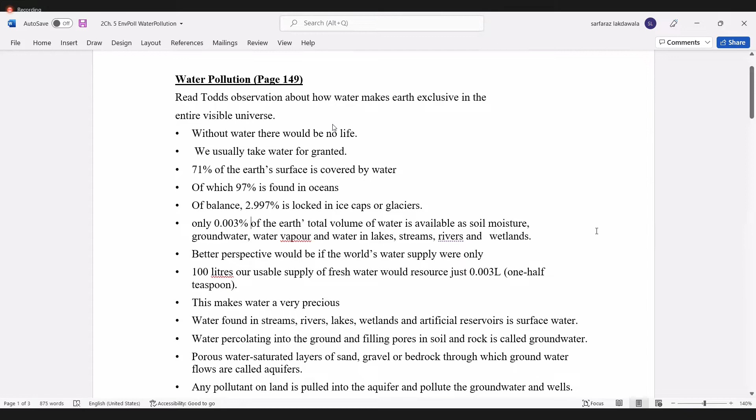No idea? Let me tell you, you'll be surprised. This hair dye is used to color buffaloes, which are sold in the mandi market. The blacker the buffalo, the better its health is perceived to be, so people dye them and sell it for a good price. Nothing surprising in our country - we even sell humans by coloring their hair, marketing them. So why can't we market and sell buffaloes the same way?

So this was research done by Godrej themselves, to find out why hair dyes sell more in Haryana than any other place, and they found this was the major reason. Apart from people using it, which isn't high consumption, it's for buffaloes. And if you want to paint one buffalo, you need not one box but many, so obviously consumption is high.

Now we are diverting from our topic. Our topic is water pollution, but since we started talking about washing of cattle in the river and water.

So you are teaching this from which book? Is this available on LMS? The whole book is there in electronic format - I am teaching you from extracts from the book. There are 3 books available. The one with Captain Subramaniam is more related to the last few topics, which is meteorology. It is also environmental science, but meteorology will be a separate subject for you next semester. I'll just cover a few topics from that as per your syllabus, which is at the end - the atmosphere. The video shown yesterday was from that topic. Then there's precipitation, visibility - all meteorology. You'll have a proper subject called meteorology till your second mates also. So Captain H. Subramaniam's book is part of the Nutshell series, and electronic copies are also available on Moodle.

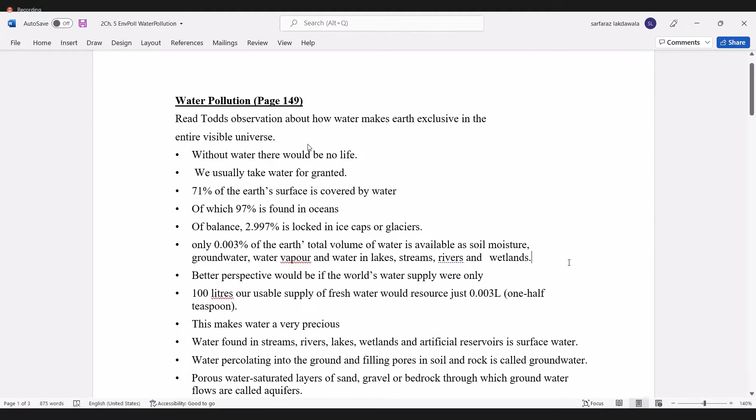Now, making of artificial reservoirs. India as a country is blessed with so much rainfall that on rainwater alone, the whole population, which is not a very small population, can survive. And in places where it doesn't rain or there is scanty rainfall, even if we send water from places with heavy rainfall and lots of waterfalls, we will be self-sufficient only with rainwater.

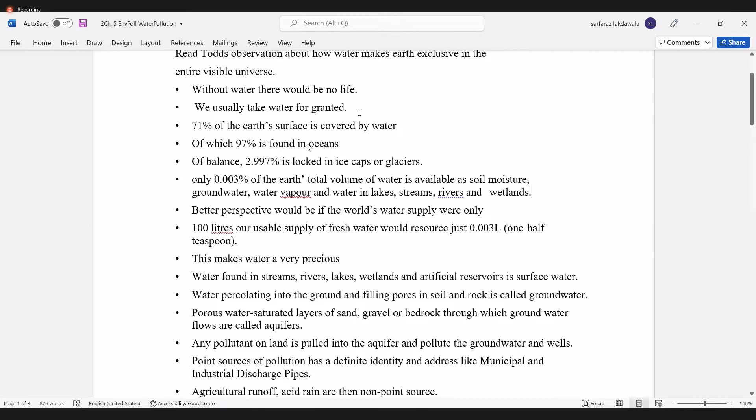This water is found in streams, rivers, lakes, wetlands, and artificial reservoirs. We need to increase artificial reservoirs where there is heavy rainfall so that we can supply places with very little rainfall. This was done a few years back. A train load of tankers was sent from here to Vidarbha. Vidarbha is in Maharashtra itself, which is generally dry most of the monsoon season, and a drought-like situation was developing there. So water was sent from here.

Now what are we doing? We are making concrete roads and tars in our backyards. We are putting tiles for making a sit-out. We are not allowing this rainwater to percolate into the soil. When we do that, it drains into the drainage system. And where does the drainage system go? It goes to the sea. If it goes to the sea, it mixes with salt water and is of not much use to us.

So we need more artificial reservoirs. The government has been encouraging rural areas to have this because in urban areas the land is expensive, and they would not like to invest there for artificial reservoirs. In rural areas it is compulsory to have this now, and they have even funded it, but then corruption comes in the way.

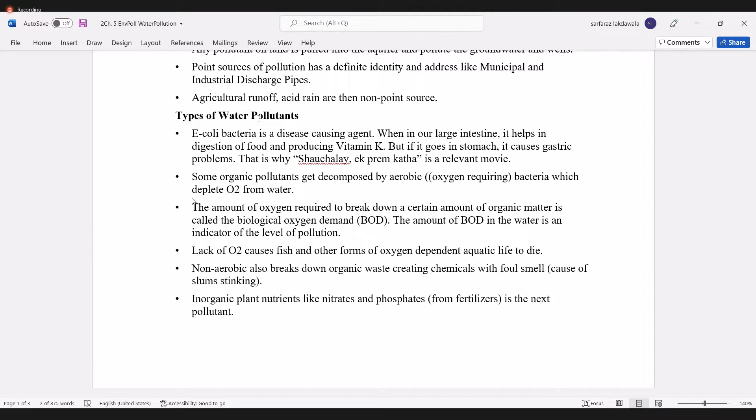Inorganic plant nutrients like nitrates and phosphates from fertilizer are also pollutants. They are absorbed by the soil and percolate down with the water to the aquifers. Once it reaches the aquifers, it will travel all over the places.

These nutrients cause excessive growth of algae and other aquatic plants, which is known as eutrophication. This leads to clogging of pipes and changes the taste and odor of water. When these algae and aquatic plants grow in excess, they clog the pipelines, change the taste of the water, and also consume oxygen, affecting fish and other aquatic species.

The chemicals used in pesticides also pollute the soil and water. They are absorbed by planktons, and the fish eat them. The fish are eaten by birds. We eat both the birds and fish. So finally, all this is going to come to us, whether we like it or not.

DDT is a pesticide used in farms to kill insects. It makes birds lay eggs with thinner shells. Bird eggs were not having enough material because of the DDT side effect, and the shell was weak and thin, and it used to break prematurely, and the chicks were never hatched. So this causes reproduction problems. Next type of pollutant...

Woke up from sleep, woke up. I was calling the IT department. Why are you sleeping? Zero 071, can you read me? Yes sir. You are sleeping, no? No sir. Then I am asking you to make me host since last 10 minutes. What were you doing? Sir, I had gone to the toilet, so I didn't notice. Bullshit, don't give me bullshit. Grow up at your age, don't behave like school kids. I had gone to the toilet. Even school kids don't behave that way. Sorry sir. Tell me, are you sleeping or not? No sir, I was not sleeping. Then why are you not paying attention? I'll mark you absent for both the classes. Sorry sir, it will not happen again. You better make sure it doesn't happen again, because I will make sure you don't attend any of the class after that. Sorry sir.

So what we were talking about: the detergent which you will be using on the ship. Maybe the product has been made by the same companies which make it here, but the product is going to be different, because this gray water from washing your clothes also goes to the holding tank, and from there it goes to the sea after treatment. So we are even strict about using a particular type of detergent which is less harmful to aquatic life.

Insoluble particles of soil and other solids that become suspended in the water cause mixed pollution. These are particles which do not dissolve in the water and they remain suspended in the water. They make the water mucky and hazy. They also obstruct the sunlight from reaching the seabed or waterbed where the planktons grow. So they do not get sunlight, they can't do photosynthesis, and their flora is affected. Flora is food for fauna, so that is also affected. Finally, we do not get fish to eat.

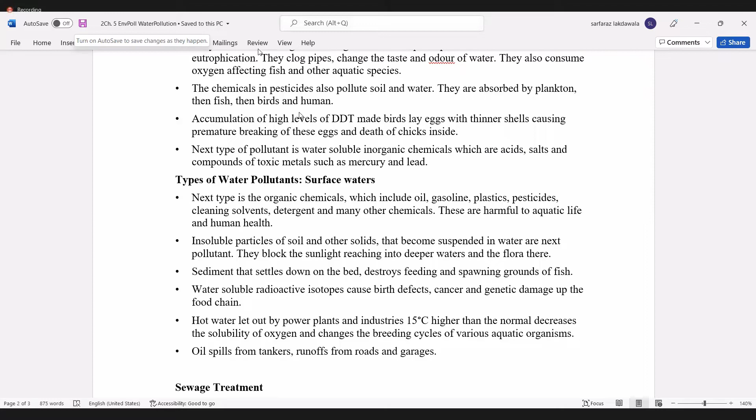Oil spills from tankers and ships which carry oil, as well as runoff from roads and garages, also cause pollution. The oil does not mix with water, it floats on the surface. Oil can create a layer which will not allow sunlight to go in, contaminating growth and killing most of the aquatic animals. And oil, being a byproduct, has a toxicity level which can cause the whole ecosystem to collapse within days.

Sewage treatment. Primary treatment of the sewage consists of temporarily holding it in the sewage treatment tank or quiescent basin where heavy solids can settle to the bottom and oil, grease, and lighter solids float to the surface. The settled and floating material are removed, and the remaining liquid may be discharged or subjected to secondary treatment.

The settling material is removed as sludge. The floating material is also removed easily, but the material which is mixed or soluble along with the water has to go for secondary treatment.

Primary treatment normally removes 35% of the biological oxygen demand and 60% of the suspended solids. We will see in a video what type of treatment is effective, and for how much percentage, in removing the biological oxygen demanding material.

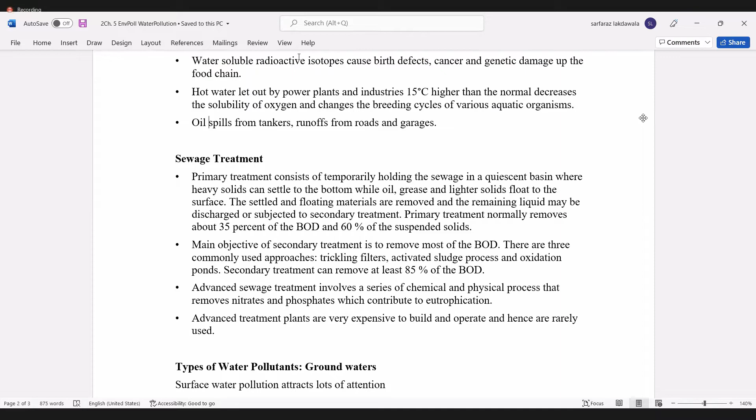The main objective of secondary treatment is to remove most of the biological oxygen demand.

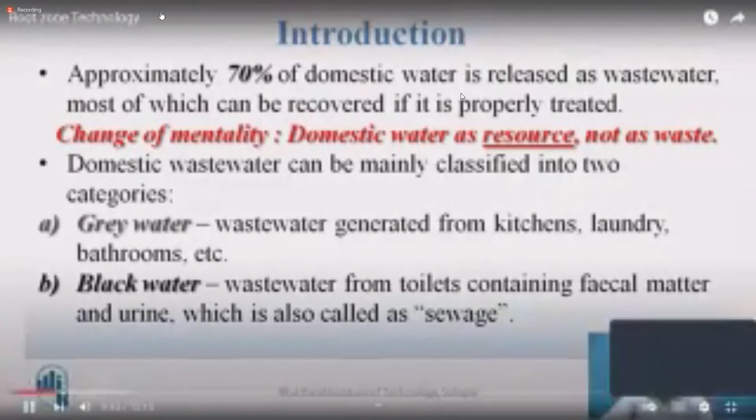Domestic wastewater is mainly classified into two categories. One is grey water, the water generated from kitchens, laundry, bathrooms, etc. The other is black water, the wastewater coming out from toilets, containing a large amount of fecal matter and urine, which is also called sewage.

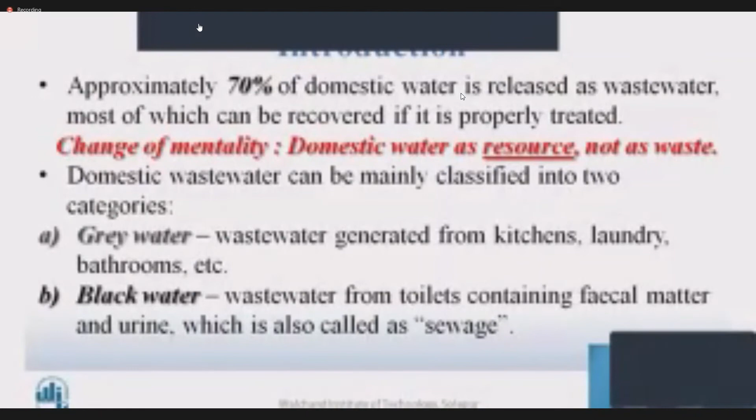So now to treat this kind of domestic wastewater, a new technology has come up, the root zone technology. First, we will understand what is meant by root zone. Root zone is a scientific term used to cover all the biological activity among different types of microbes, the roots of plants, water, soil and the sun. It consists of planted filter beds containing gravel, sand and soil.

The root zone wastewater treatment, in short RZWT system, utilizes nature's way of biologically processing domestic and industrial effluents. This system makes use of biological and physical treatment processes to remove pollutants from wastewater.

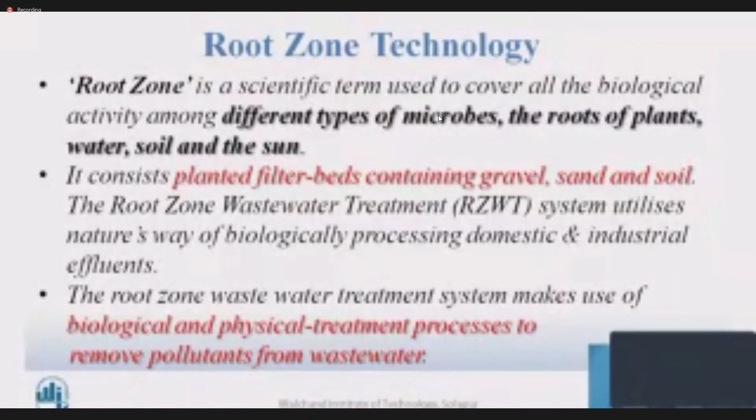Now in the picture, you can see the wastewater which is being collected in the settling chamber is transferred as an inlet into the root zone technology system, in which the bed has a lot of gravel on which the reed bed plants have been implanted, grown on this gravel. So their roots will automatically percolate inside the gravel, providing a lot of rhizosphere area, so that the microorganisms near the roots and adhered to the gravel will automatically take out the organic matter flowing through this water. So the organic matter captured by microorganisms will be treated aerobically.

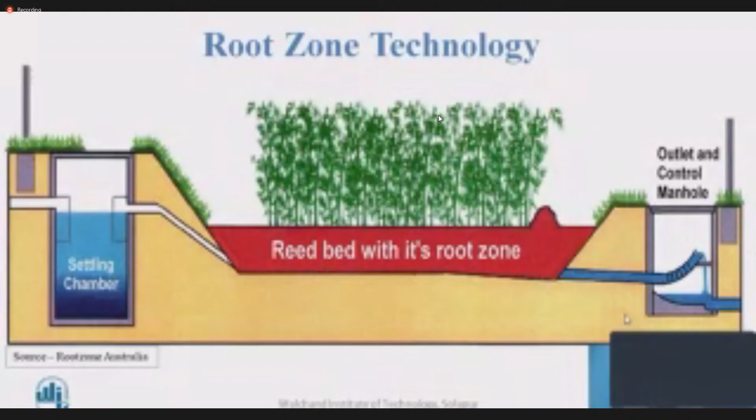This is because the carbon dioxide present in the atmosphere is easily taken up by the plants, and they convert it and throw out a lot of oxygen through the roots. In the rhizosphere nearby, oxygen is automatically taken to the microorganisms, so they get sufficient oxygen and also a lot of organic matter from the wastewater. So automatically they are treated, and with the help of gravity, the treated water or effluent is collected from the next chamber. So in this fashion, the root zone technology works.

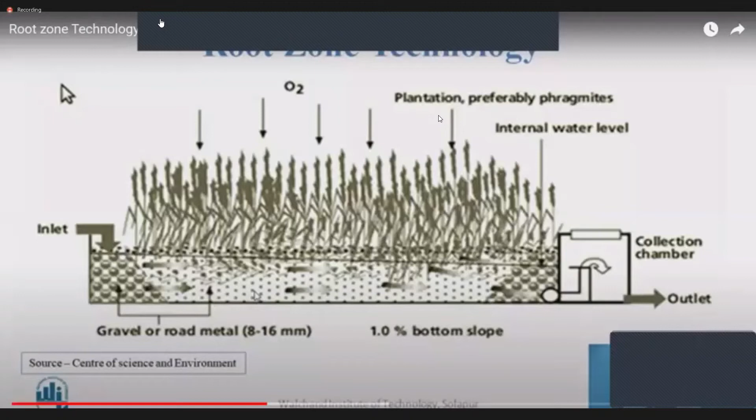Now in a more complicated way, you can see the diagram where the inlet is shown on the left part, and through the gravel the wastewater comes inside the root zone. In our setup, the inlet is from the right side and it flows to the left side with a gradual slope of 1% in the bottom. The gravel you will not be able to see because it is under the reeds; you may only see the reeds on top.

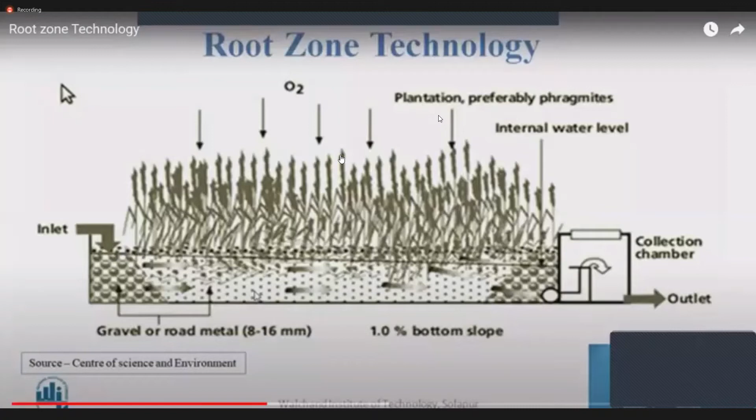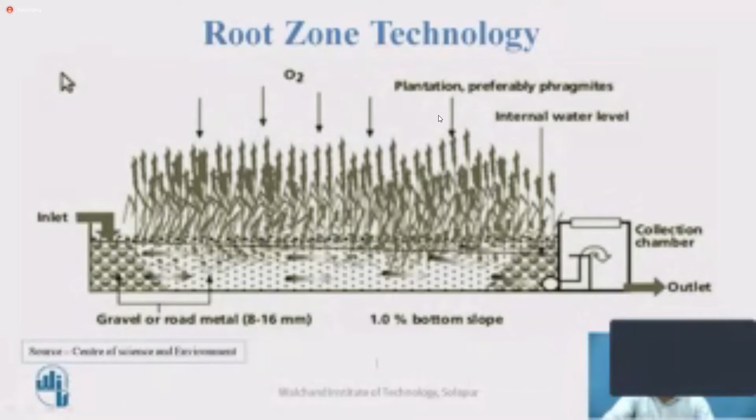The roots give out a lot of oxygen from the atmosphere, and near the root a lot of rhizosphere is created, where the microorganisms residing on the gravel take a lot of oxygen and a lot of organic matter through the flow of wastewater. The gravel size should be between 8 to 16 mm, and the slope for the wastewater flow is around 1%. As the wastewater flows, it is slowly treated by the microorganisms and taken out from the outlet. These reed plants, or other plants capable of growing on the gravel, must be used, ensuring a large amount of oxygen is taken from the atmosphere and given out in the gravel area.

New technologies have come up and have been commercialized. Let us see what new technology has been developed and is being used at a higher rate. There are 4 compartment methods which have been used.

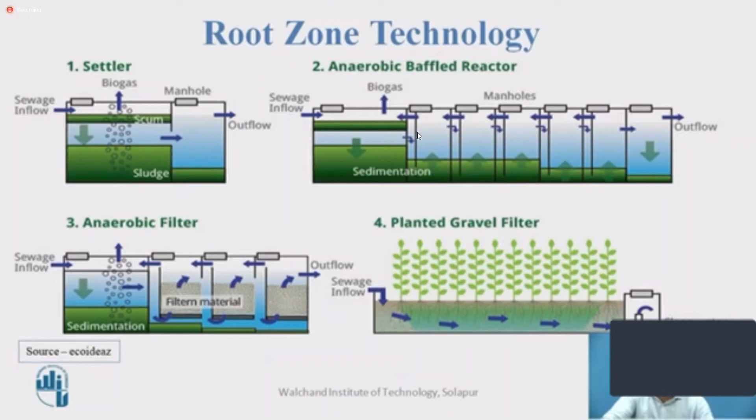Now talking about the efficiency of root zone technology, the effluent water has a turbidity removal efficiency around 75%. The TSS removal is around 70 to 80%. The coliform bacteria removal efficiency is around 85 to 90%. BOD removal efficiency is relatively lower, but if we go for multi-digester systems it can increase. For pure root zone technology, it is around 60 to 70%.

Talking about COD, it is having 75 to 85%. Ammonium nitrogen has a removal efficiency of 50 to 58%, and organic nitrogen has the highest removal efficiency, that is 95 to 99%.

Talking about its advantages, it is the most innovative and eco-friendly system. Both grey water and black water can be suitably treated and reused. It has a low cost, is virtually zero energy, and is maintenance free. No need to add any input such as chemicals, mechanical pumps, or external energy. It reduces maintenance and energy cost.

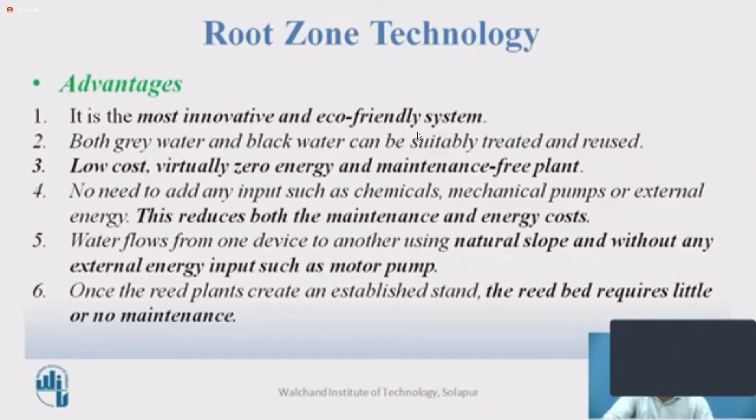The water flows from one device to another using a natural slope, that is 1% bottom slope, without any external energy input such as a motor pump. Once the reed plants create an established stand, the reed bed requires very little or no maintenance.

So let us have a few review questions. Root zone is a scientific term used to cover all the biological activity among different types of microbes, roots of plants, water, soil and sun, or all of the above. The wastewater flows through the root zone in horizontal or vertical way where organic pollutants are decomposed biochemically by bacteria, due to the presence of rhizosphere in the plant roots - true or false? The filter media in RZWT is selected carefully to provide favorable conditions to reed plants, bacteria, avoid clogging, or all of the above.

Okay, can you try and give the answers for these 3 questions? Reno Stanley. Yes, sir. Okay, now you are awake. So can you give me the answers for these three questions? Yes, sir, I will try it. Okay, fine. Did you go back to sleep again? No, sir, I am trying it. So I'm waiting for you. Yes, sir.

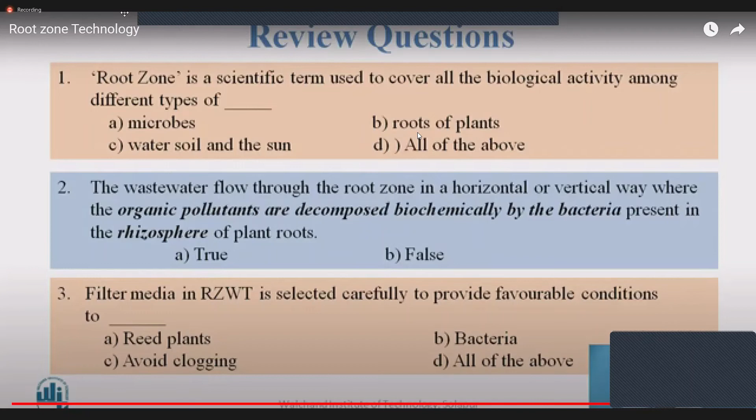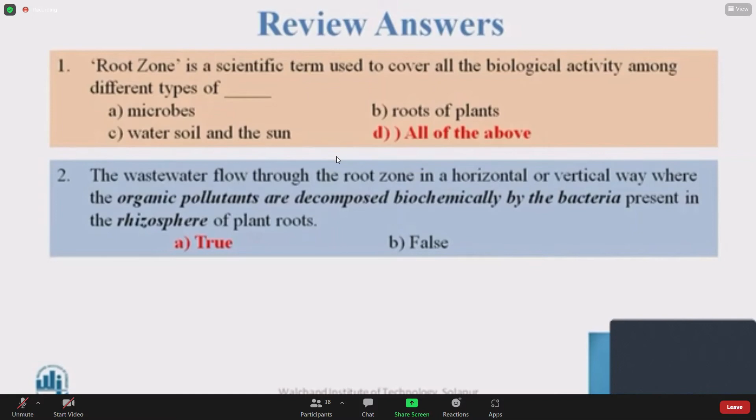Bacteria, avoid clogging, or all of the above - so let us see their answers. Root zone is a scientific term used to cover all the biological activity among different types of microbes, roots of plants, water, soil and sun also. The statement that wastewater flows through the root zone in horizontal or vertical way where organic pollutants are decomposed biochemically, using microorganisms, due to the presence of rhizosphere - the sphere near the roots of plants where oxygen provision is given to microorganisms - this statement is very much right. The filter media in RZWT is selected carefully to provide favorable conditions to reed plants, bacteria, and also to avoid clogging. So all of the above is the right answer.

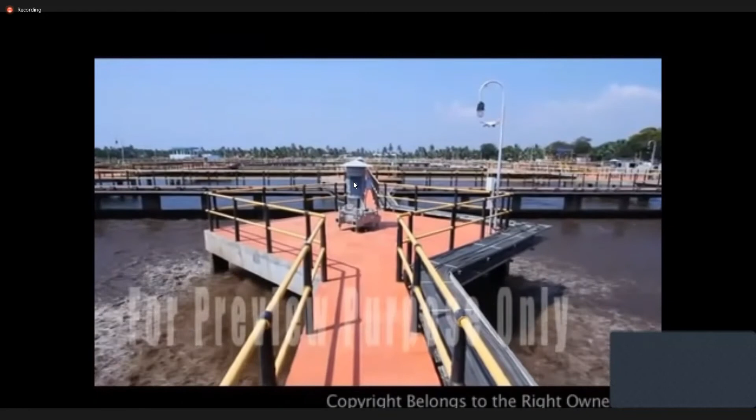The plant follows a process of collecting sewage generated from kitchens, bathrooms and toilets of city homes and hotels through a massive network of pipes and scientifically treats and cleans them.

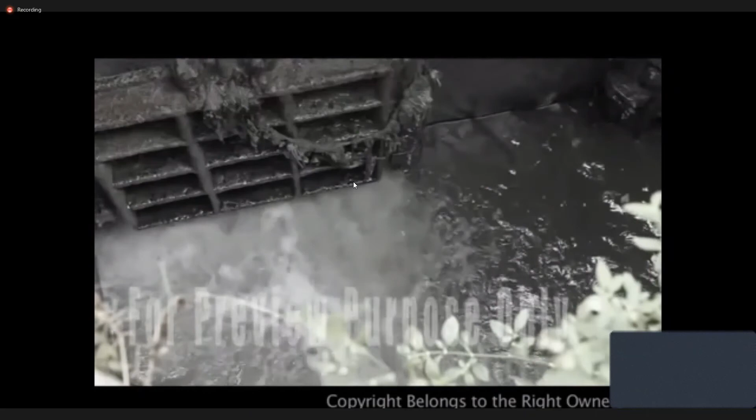All the wastewater collected through the sewage network set up in Trivandrum decades ago was used for fodder cultivation in the 100-acre barren land at Muttathara. This is known as sewage farming. However, with the expansion of the city and growth in population, this method has become unfeasible and impracticable.

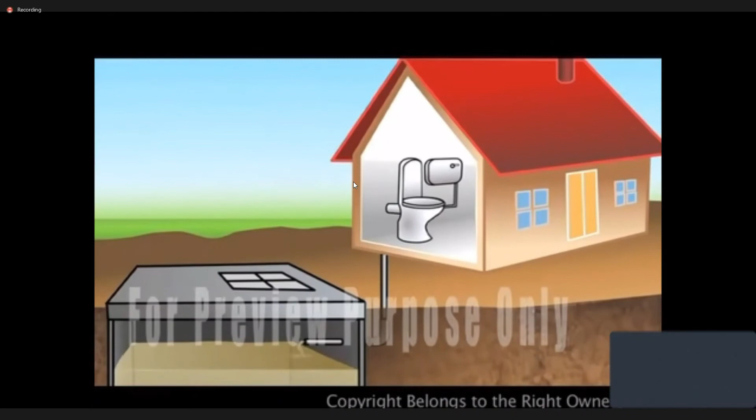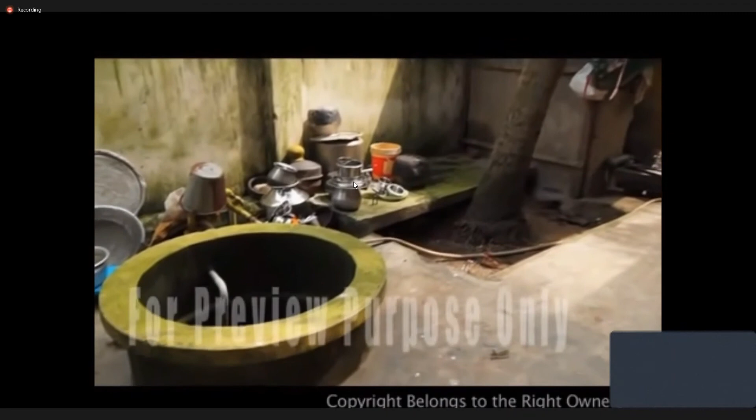Septic tanks are also not a permanent solution for sewage treatment. Septic tanks set up in plots of 4 or 5 cents pose the threat of contaminating the water in the well, not just in the plot, but also wells in the neighboring ones.

This is because of 2 reasons. The required measures for safely setting up a septic tank are often not adhered to, and the accumulated waste is not removed periodically. As such, the wastewater that emanates from sewage quickly mixes with groundwater.

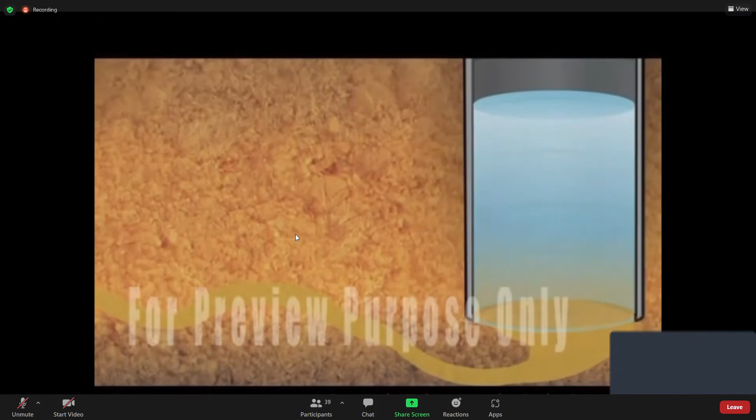One of the reasons for groundwater being polluted is leakages from the septic tank. So those who have septic tanks at home, please make sure that they are cleaned from time to time and are not leaking into the groundwater level, otherwise the bore well next to it, you are drinking the same water.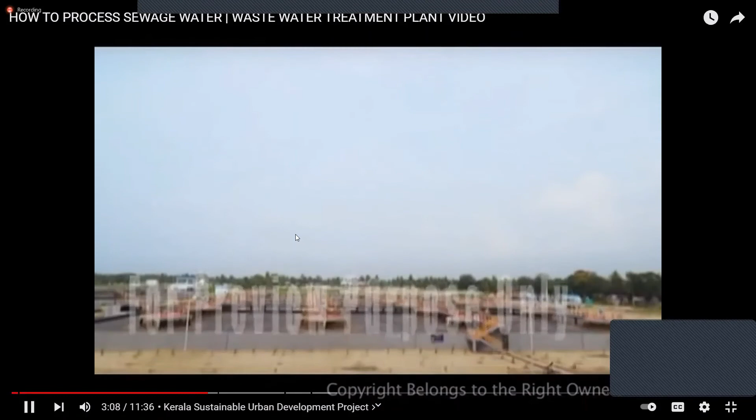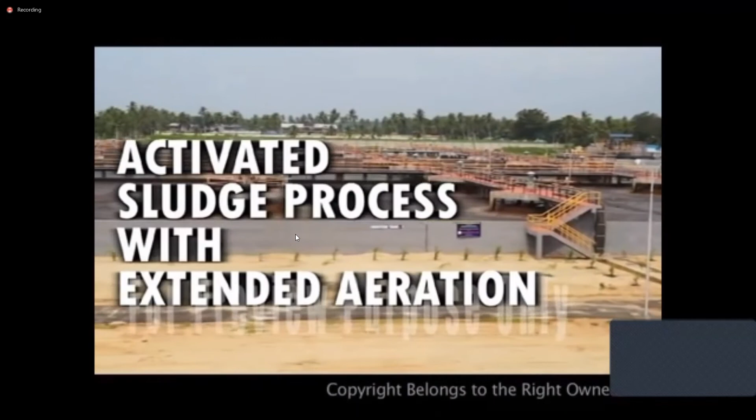This is where the need and relevance of a scientific and large-scale sewage treatment sets in. The plant uses an advanced technology called the activated sludge process with extended aeration, which cleans and processes wastewater with zero negative impact on the environment.

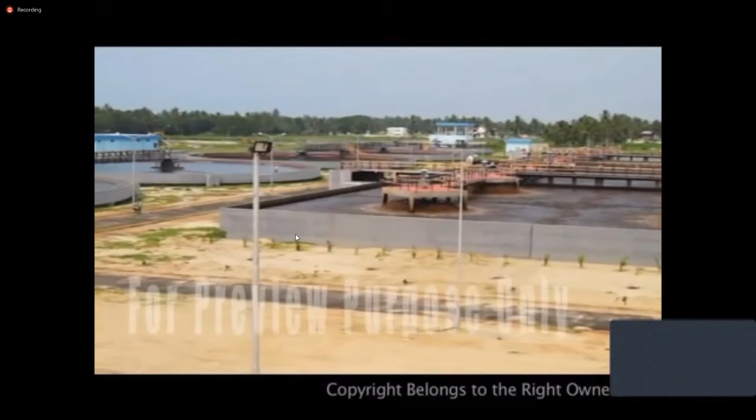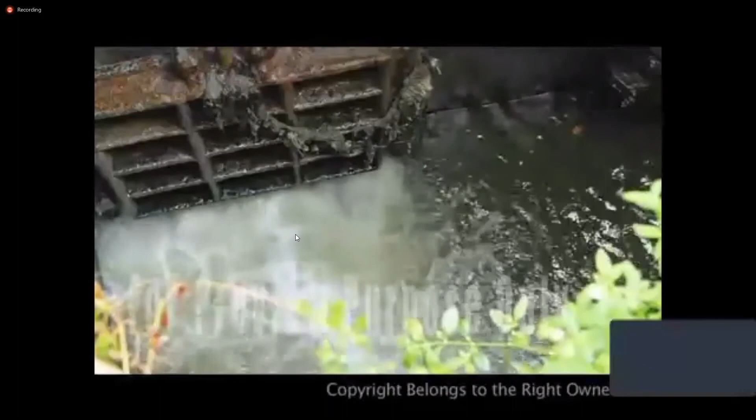The wastewater generated from every house in the city is collected and brought to the sewage treatment plant through a network of sewerage pipes. The sewerage pipes are laid at a depth of 1 to 7 meters below the surface of the road in a tilted manner.

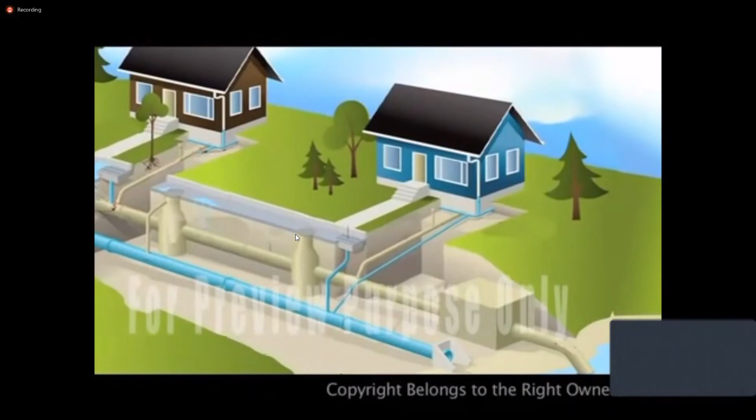The flow of water in the pipes is enabled by the force of gravitation. A pumping station has been set up after every 6 or 7 kilometers, from where the water is pumped to the next point. This process is repeated until the wastewater reaches the sewerage treatment plant through the network of pipes.

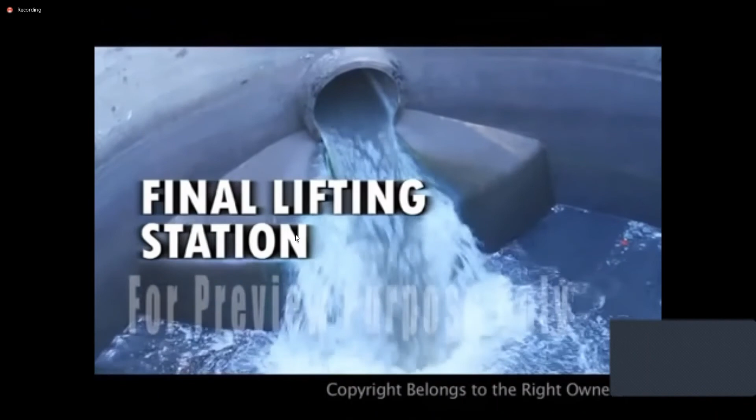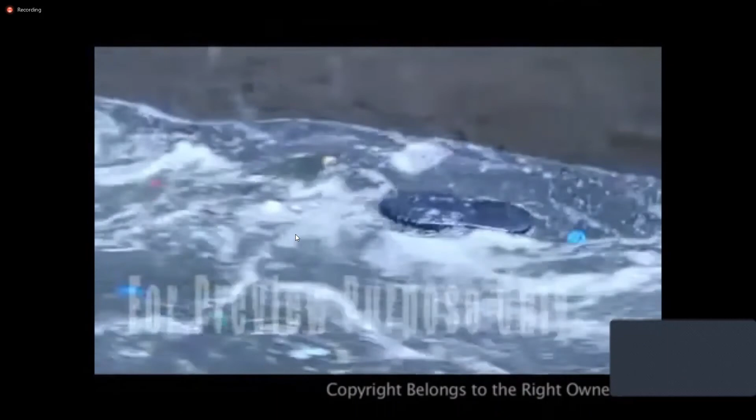This is the final lifting station of the plant. There are 2 such tanks in the plant, and each is equipped with 3 pumps. Depending on the amount of water that reaches the plant, 1 or more pumps function.

Through these pumps, wastewater reaches the inlet chambers. From the inlet chamber, the wastewater is directed to the screen chamber.

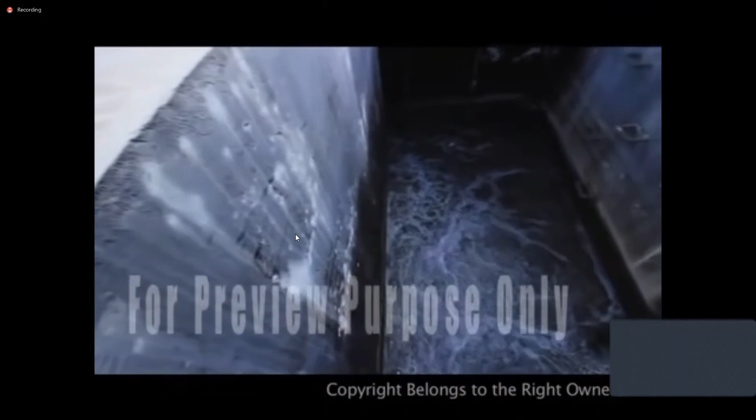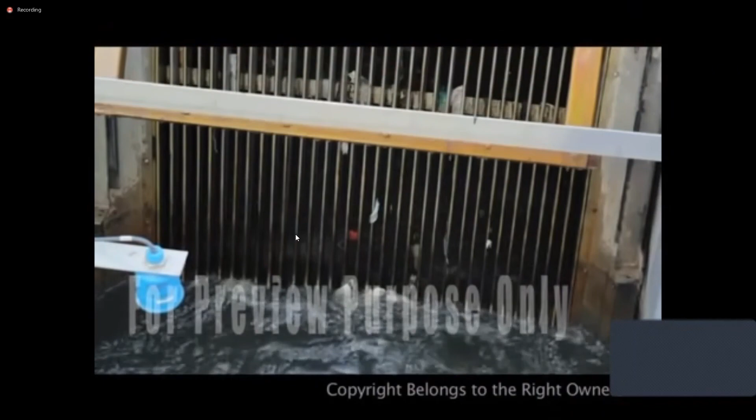In this screen, materials such as plastic, cloth, etc. are blocked. When the amount of such solid materials exceeds the prescribed limits, an automated rake enters the water, lifts these substances and deposits them outside through a conveyor.

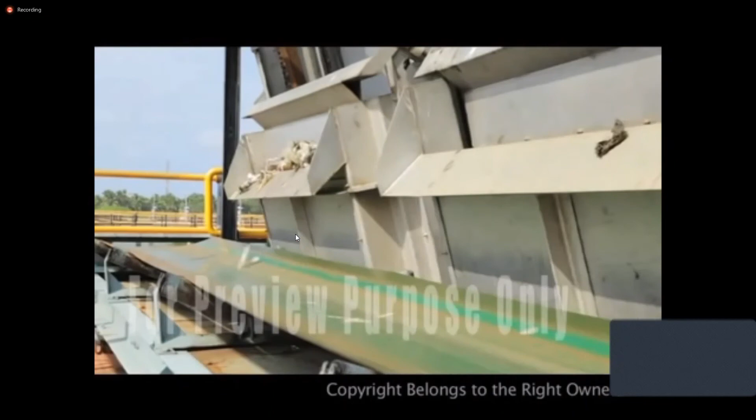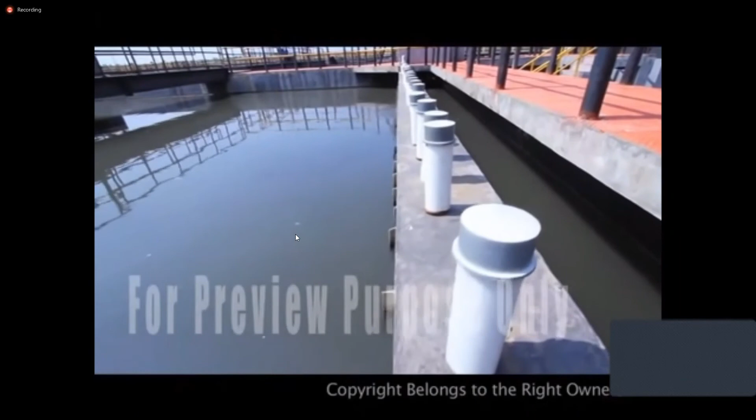The wastewater then flows to the grit chamber. Here, the sewage is allowed to stand for a specified time, during which sand and other substances with high density get settled at the bottom of the grit chamber.

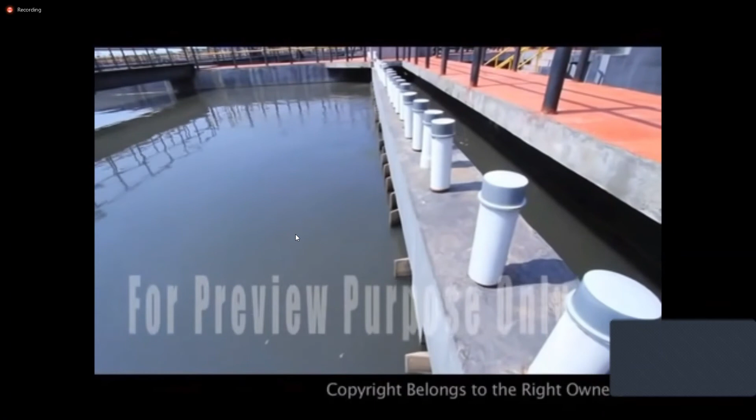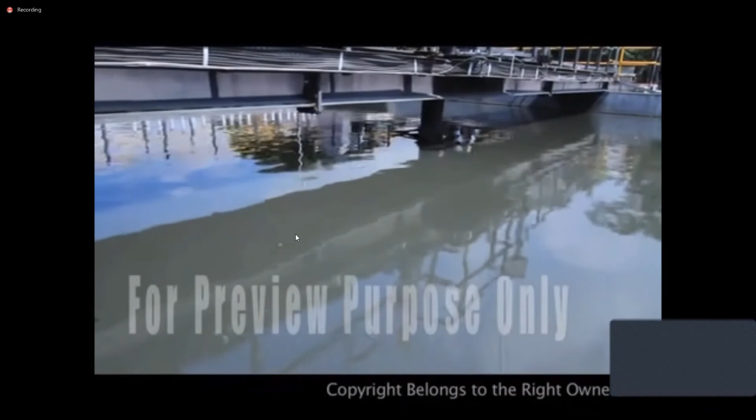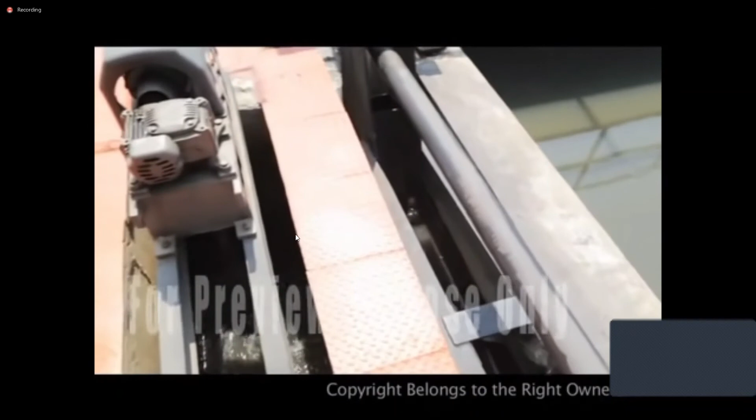A slowly operating scraper deposits the substances at the bottom to one side of the grit chamber, from where they are taken outside through a conveyor. An agitator is used to prevent the outflow of organic waste in the water along with the grit.

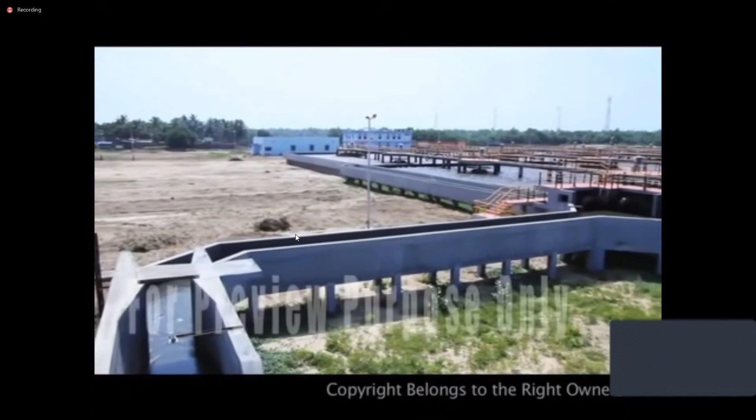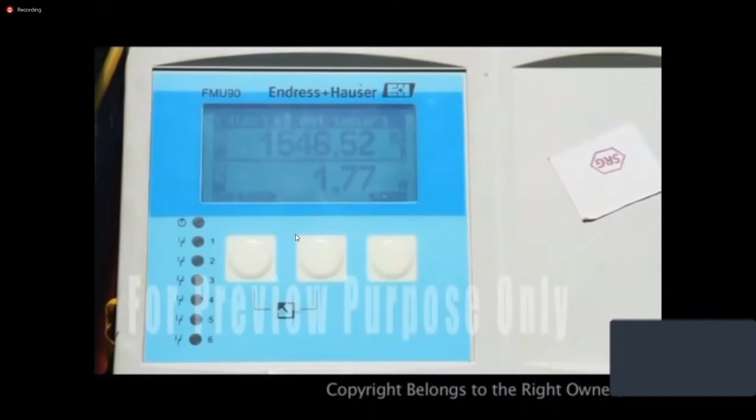The water from the grit chamber is then routed to the aerator tank. An instrument called a parshall flume records the quantity of wastewater as it flows through this channel after desilting the grit. The wastewater then flows into the aerator tank through numerous pores in the other channel.

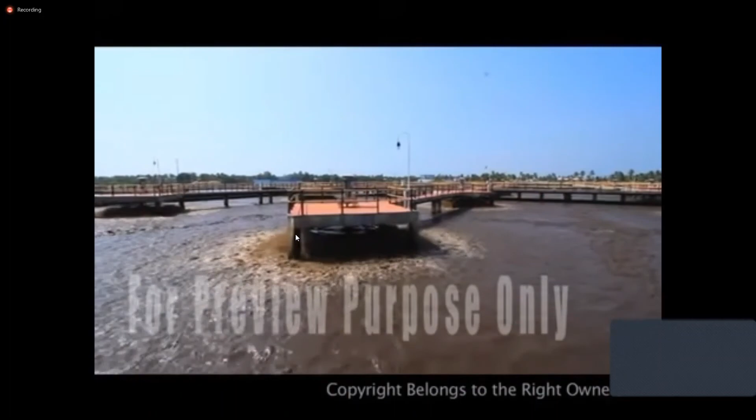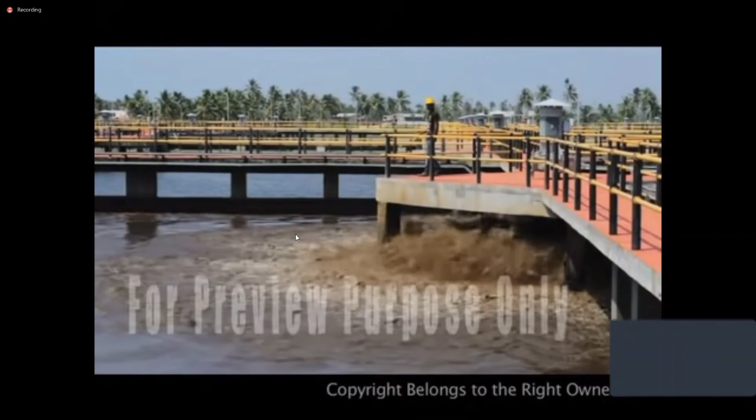It is in the aerator tank that the major process of cleaning and processing wastewater takes place. The water is cleaned with the help of bacteria that eats away the organic waste in the water. The functioning of the aerator in the tank increases the level of oxygen in the water.

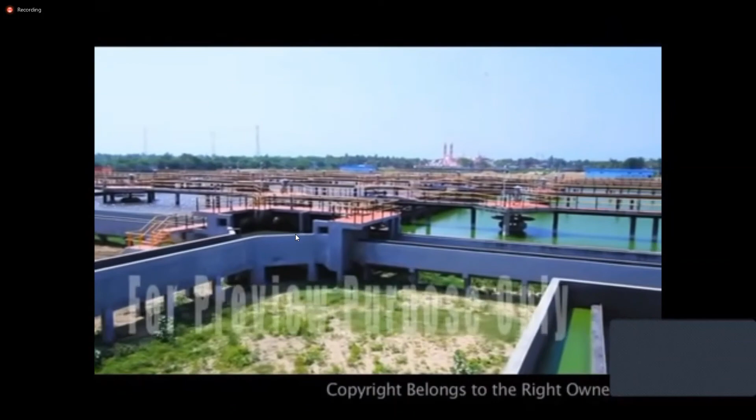The availability of oxygen and food causes the bacteria to multiply rapidly, and they eat away all the organic waste in the water. The aerator in the tank is allowed to operate depending on the water's oxygen level.

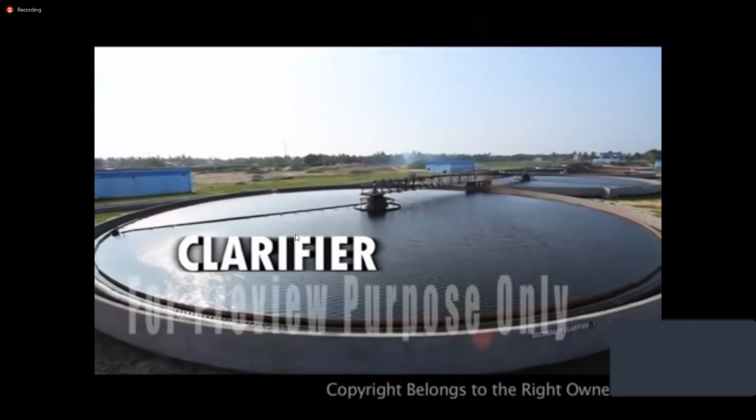After the treatment in the aerator, the water is then channelized to the clarifier. As it reaches the clarifier, the bacteria in the water and other heavy substances get settled at its bottom. This is called sludge.

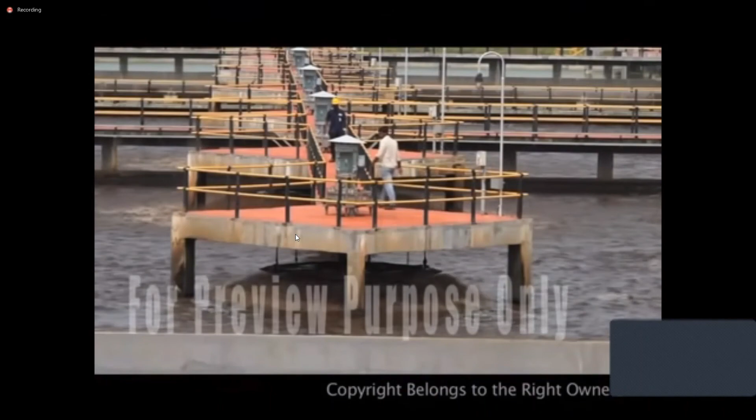The deposited sludge is brought to the center of the clarifier through scraper mechanism. A dedicated pipe carries the sludge to the sludge tank. A portion of the sludge in the sludge tank is again routed to the aeration tank. This is done to ensure presence of sufficient levels of bacteria in the aeration tank.

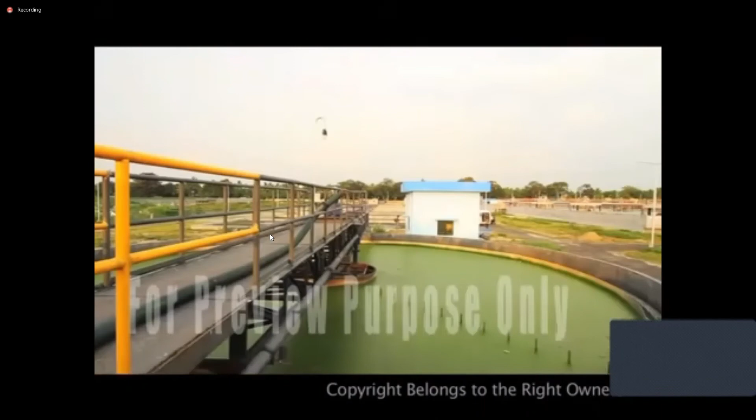Once sufficient level of bacteria is ensured in the aeration tank, the remaining sludge is thickened using sludge thickener. Sludge settles at the bottom of the sludge thickener, and the water at the top is pumped to the aeration tank via a dedicated pipe.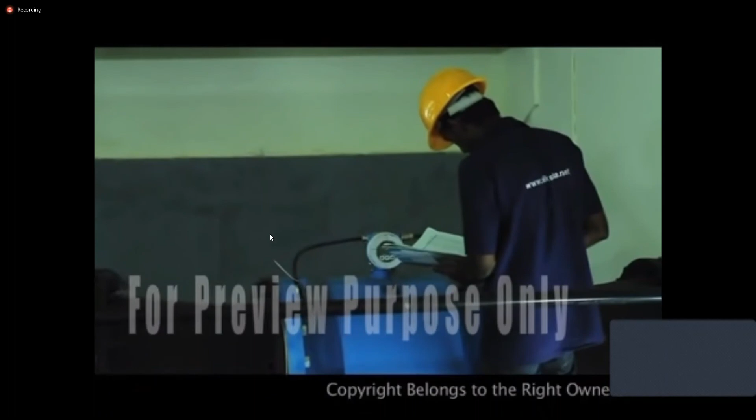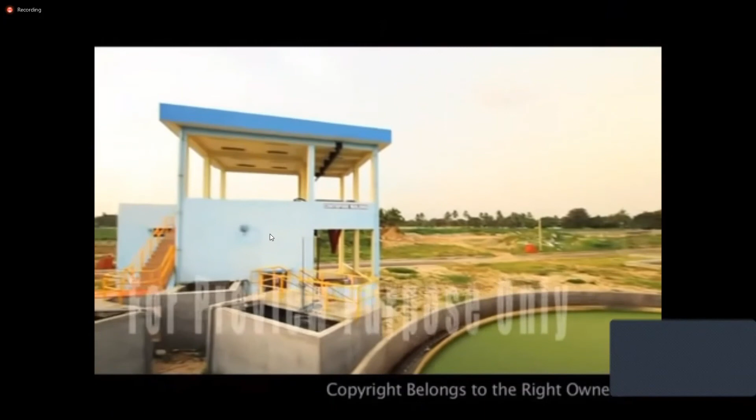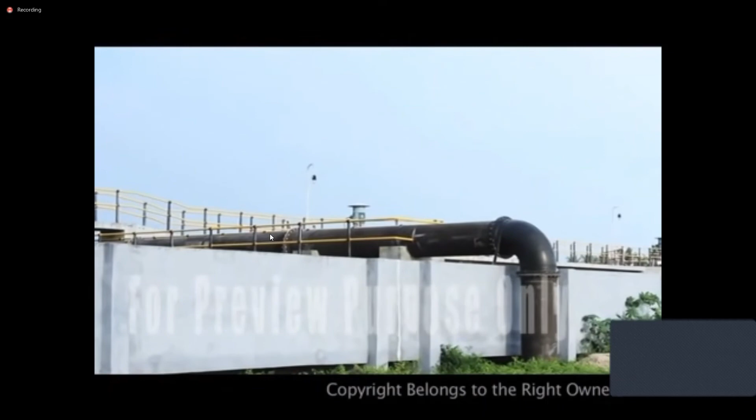The thickened sludge is brought to the center of the thickener using scrapper mechanism and is sent from there to the centrifuge through pipes. The functioning of the centrifuge brings down the volume of water substantially. The water that flows out from the centrifuge is sent again to the aerator tank for cleansing.

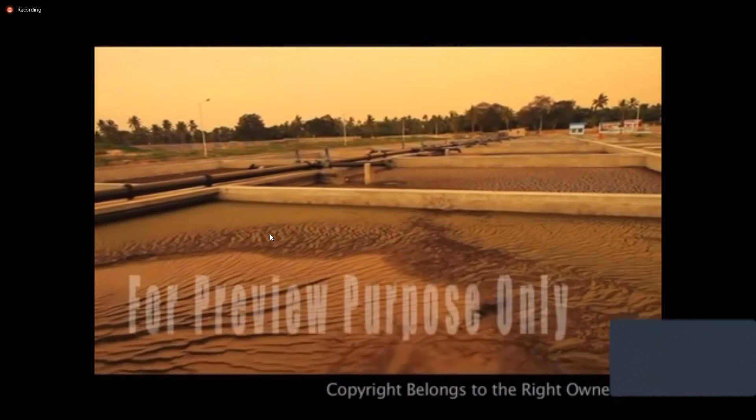During summer, the sludge from the sludge thickener is directly sent to the drying bed. Sludge may also be formed in this manner. The water from the drying bed is routed to the aerator tank.

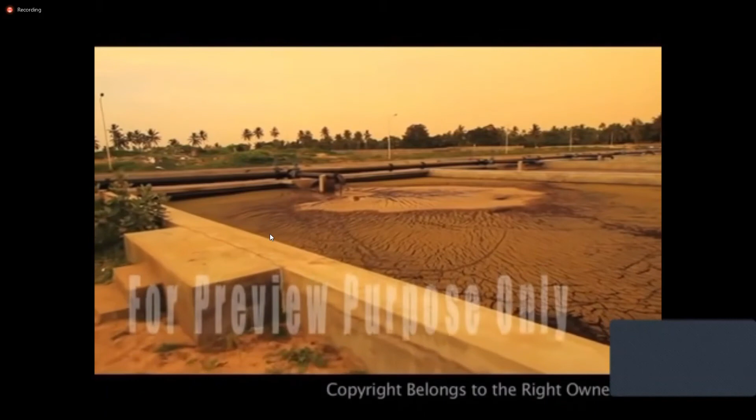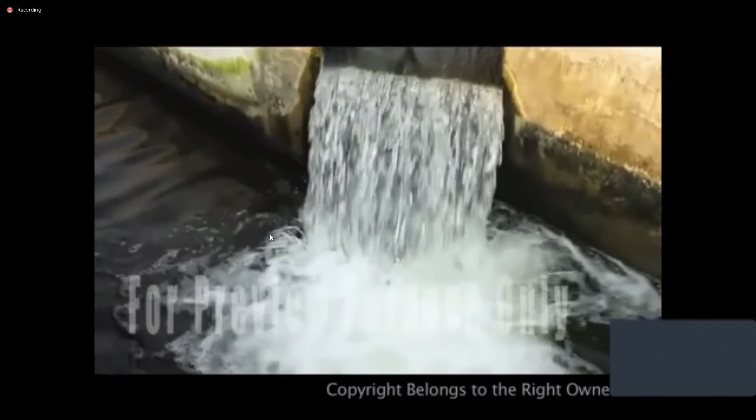The treated water from the clarifier reaches the outlet chamber through the clarifier launder. Here, the water is rid of microorganisms using chlorine.

To clear off all and any microorganisms, the water is allowed to stand in the chlorine contact tank for 30 minutes and then let out. The treated water is drained into the neighboring Parvathy Puthanar Canal. This water can be used for gardening, industrial and construction activities.

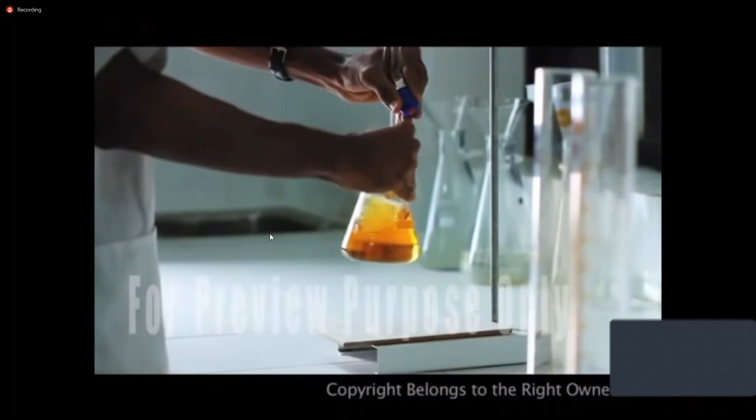To ensure that all the processes from start to finish are correctly followed and have produced the desired results, the water is tested in labs during the various phases of the process.

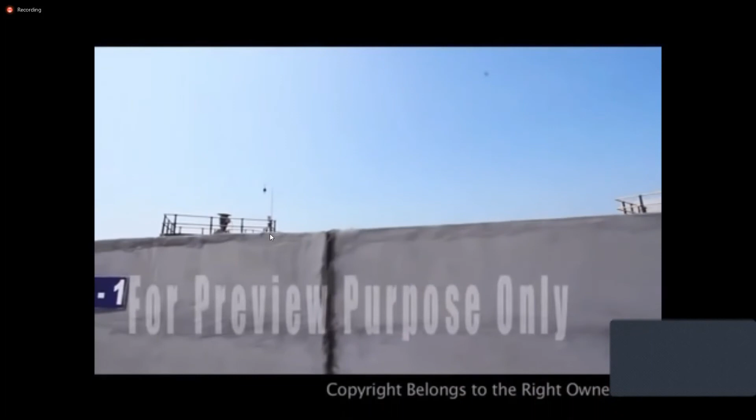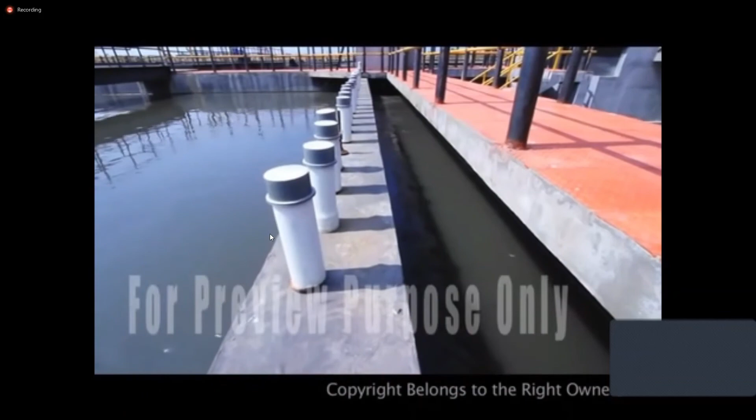This modern sewage treatment plant has the capacity to treat 107 million liters of wastewater every day. However, only 30 to 40 million liters reaches the plant daily. The maximum capacity of 107 million liters has been arrived at after considering the generation of wastewater if all wards in Trivandrum city are connected to the sewerage network and the expected population for 2030.

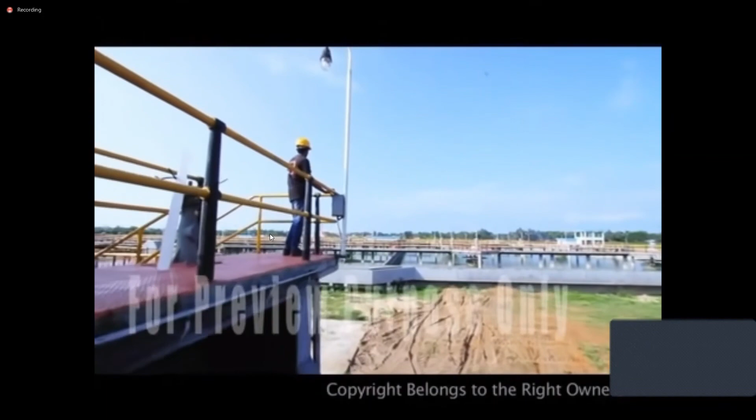Such scientifically enabled sewage treatments are imperative in all urban centers of Kerala as we work to build a healthy state free of communicable diseases.

So what you could see was a modern treatment plant, and this you will find in urban areas very commonly.

The problem which he emphasized on in the last part is that not enough capacity is being treated because not enough capacity of water is being poured into the inlet. That is because the pipelines, which is the major project that leads to the sewer, should reach every household and every building, every society, and then only it can come to the treatment plant.

Now, that project requires a lot of digging, pipelining, and covering it, and on top of that, the tar layers and cement layers and all that. That is the time-consuming project.

If you see, the urban planning does not allow any cities to develop unless a sewer system is there — only then this will be a successful attempt. But in our country, what happens first is the cities are made and then the sewer system is made, which is entirely the opposite process.